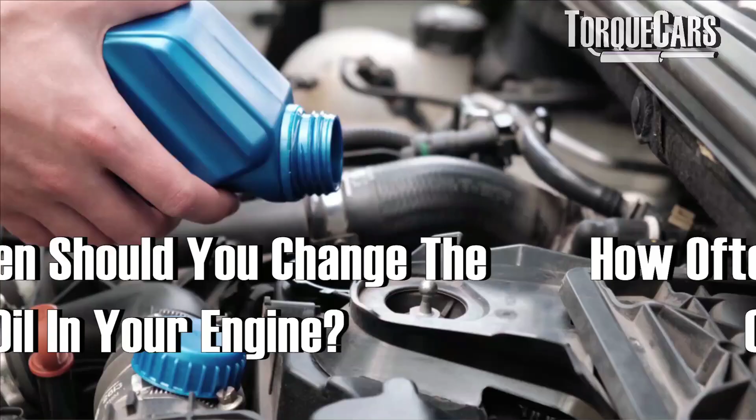How often should you change the oil in your engine? Some people say it's okay to leave it 24,000 miles or 2 years. Even some manufacturers have long service life schedules that recommend oil changes in terms of years rather than months. And other people insist that you should change the oil every 6 months or every 5,000 miles.

So in this video, we're going to look at the question of how often should you change your oil. We're going to look at what happens to oil as it ages, how it degrades, the problems you get when you don't change the oil frequently enough, and also a foolproof way of knowing for your own specific engine and car when you should change the oil. What is the optimum time or the optimum amount of miles to actually change it?

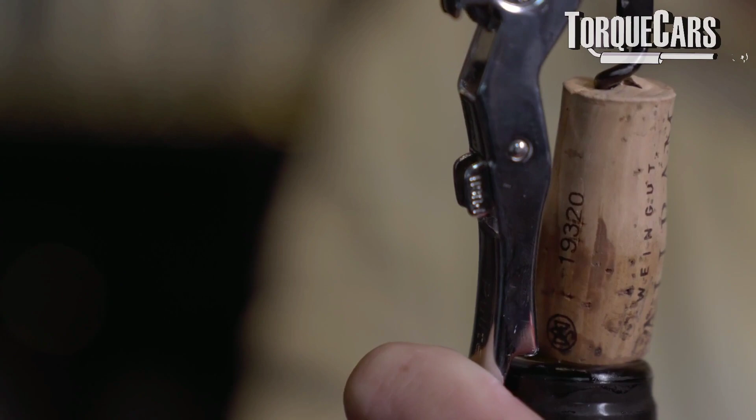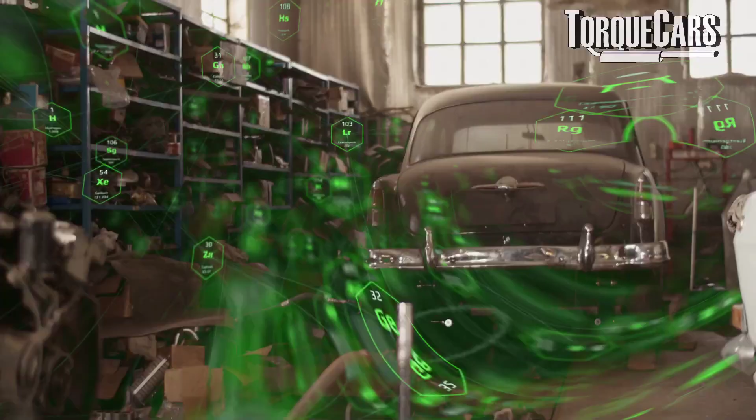So does oil degrade? Well, yes it does. Like anything, it will degrade over time. If you've ever left a bottle of wine open, you'll know that oxygen reacts with the wine, turning it into a very bitter vinegar. Engine oil also has a reaction that happens with oxygen. This oxidization process reduces the efficiency of the oil and reduces the characteristics, the flow of the oil, and the amount of protection you get from it in your engine. So even if you don't drive your car, there is an amount of time that the oil is good for inside the engine. Although it's sealed, it's still exposed to oxygen, so there's still this oxidization process going on with the oil itself.

Now inside the internal combustion engine, you're obviously burning things. You're burning the fuel, and the byproducts of that, the blow-by gases that come past the pistons, enter the oil and add to contaminants within it. So you've got various acids, various moistures. Even fuel and coolant can in some cases seep through the structure of the engine and be carried in the oil. All of those things are degrading the quality of the oil. It's becoming diluted, becoming less effective at reducing friction within the engine. So in real terms, this is changing the properties of the oil. It maybe doesn't stick to the metal surfaces long enough, or maybe the moisture content evaporates off, exposing metal surfaces, so there's no longer any oil barrier between it. So the catastrophic effect really is the additional wear and tear on your engine.

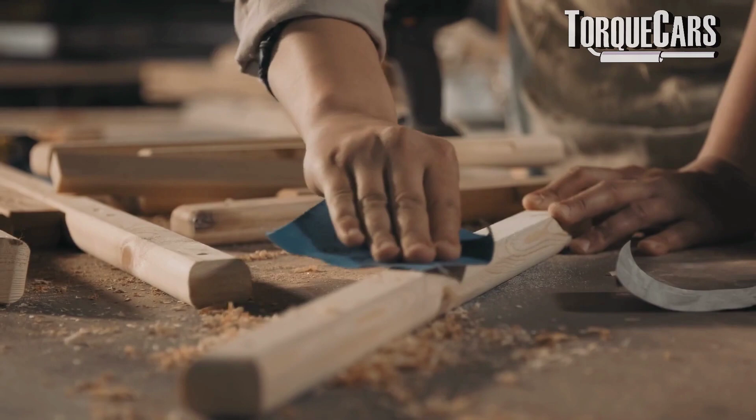So how do you know when the optimum time is to change your oil? Well, a little fact: if you were sanding a piece of wood, you'd notice tiny bits of sawdust coming off, and the amount of sawdust will really tell you how effective that sanding process has been. It's very similar inside the engine. If you've got wear and tear going on, tiny metal particles are going to be breaking off the metal surfaces as they rub against each other, contaminating the oil. That's also another problem you get, because these metal particles inside the oil will be adding to the wear and tear or abrasion inside the engine.

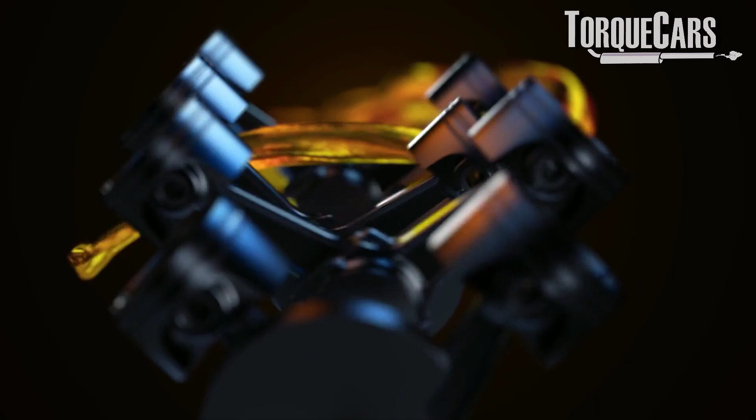It's fair to say that the oil filter itself will catch the larger particles, but we're talking about very tiny microscopic particles, and these particles flowing around the oil are really what you should be looking at when you get the oil analyzed. So when you send your oil off to a lab, they will analyze it carefully and give you a report back as to what it contains. By paying careful attention to the metal content of the oil, it will tell you how much wear and tear you get.

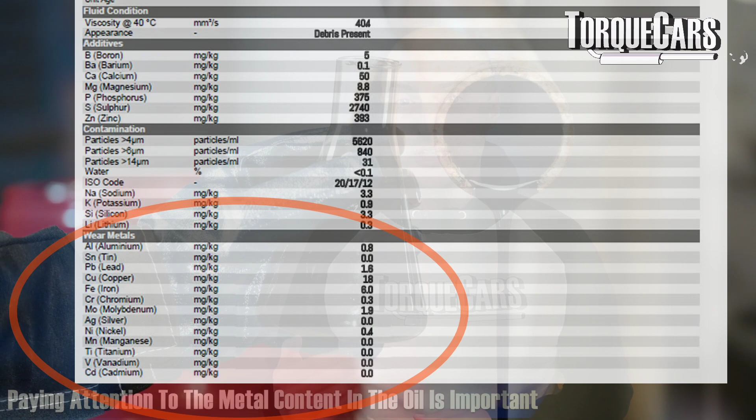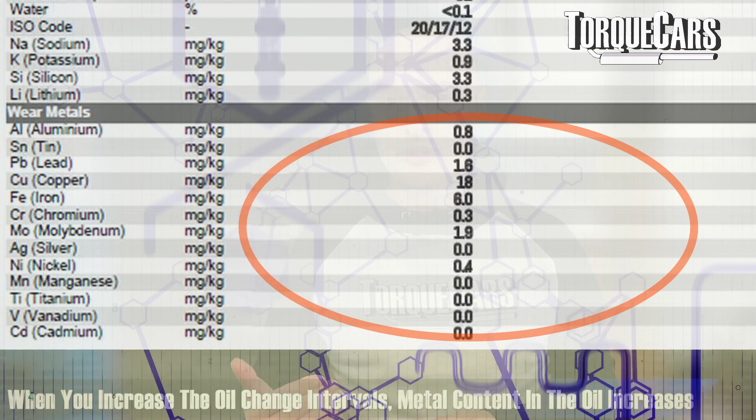So when I've done this on previous cars, if I've left the oil change to 24,000 miles as the manufacturer recommends, or 12,000 miles, you will notice there are a lot more metal particles in the oil. That would indicate that you should shorten the oil change schedule. You're not getting the protection.

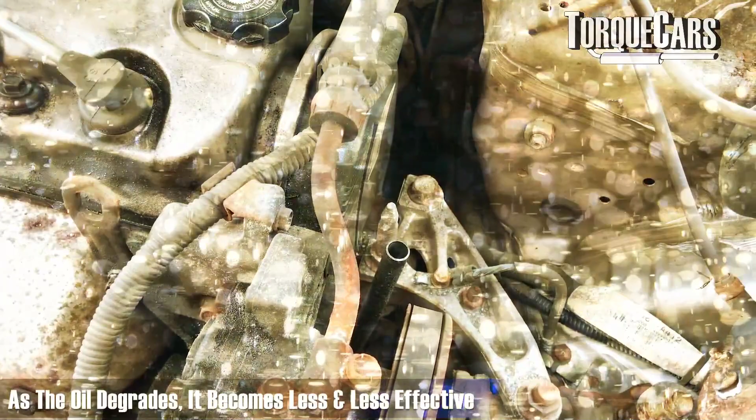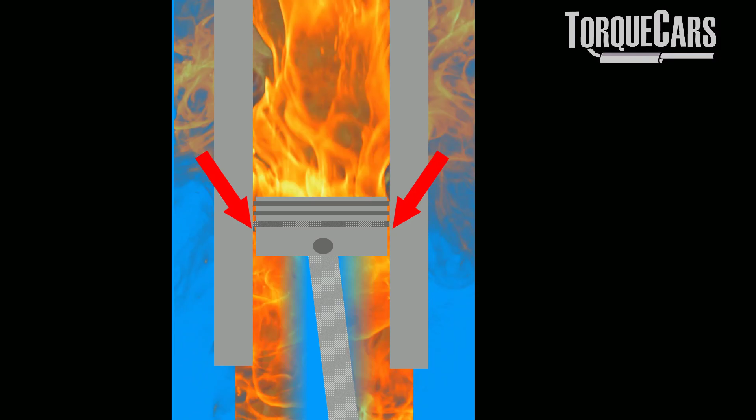The crazy thing is that the oil, as it degrades, becomes less and less effective. So the wear and tear will accelerate and get worse and worse. The longer you leave it, the more the engine will degrade. And an old worn engine degrades much more quickly than a clean, efficient engine. In a worn engine, you get problems with blow-by gases, where things don't quite meet as tightly as they were originally manufactured.

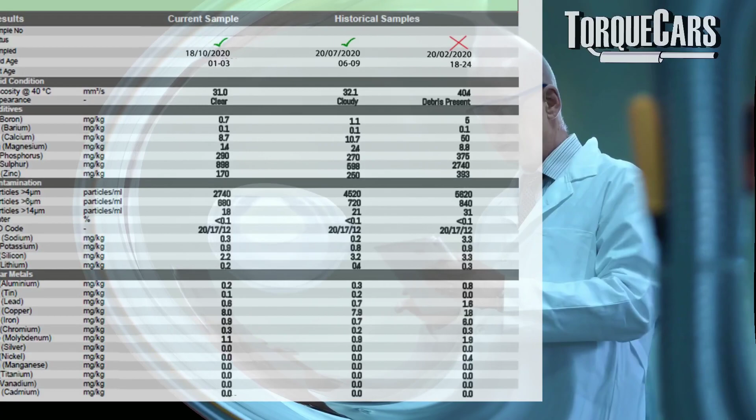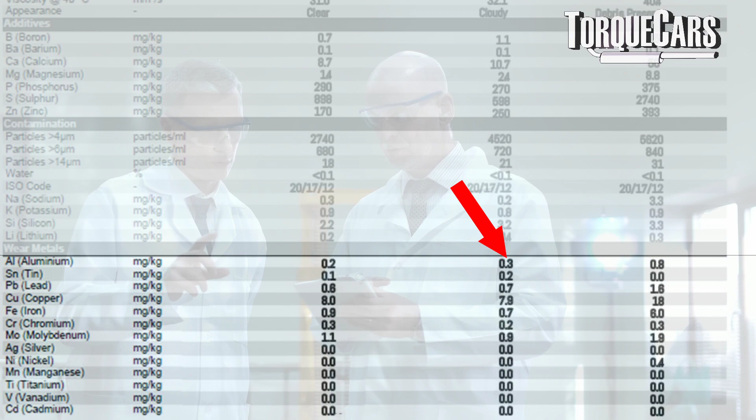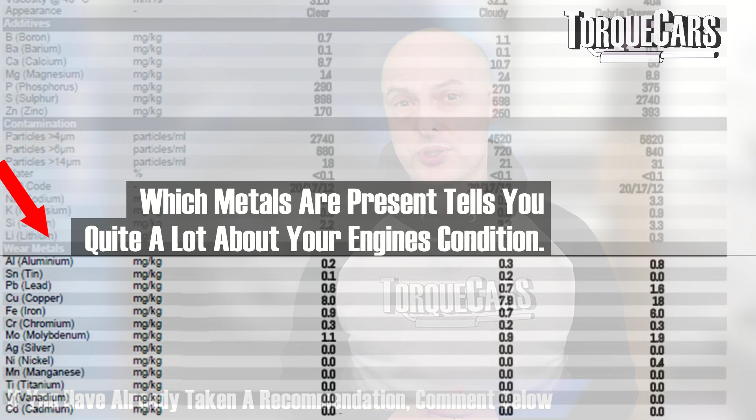So when you send the oil off for analysis after, say, 8,000 miles, you'll notice the metal particles in the oil are much reduced. But going to excessive levels like 5,000 or 4,000 miles, or 3 months, or just a few weeks, you're not getting much benefit over that optimum 8,000 mile mark. When you send it off, take a recommendation from them as to how often you should change the oil, and analyze it again at that point to see if the degradation has improved over that time. It's going to be different for every single engine out there.

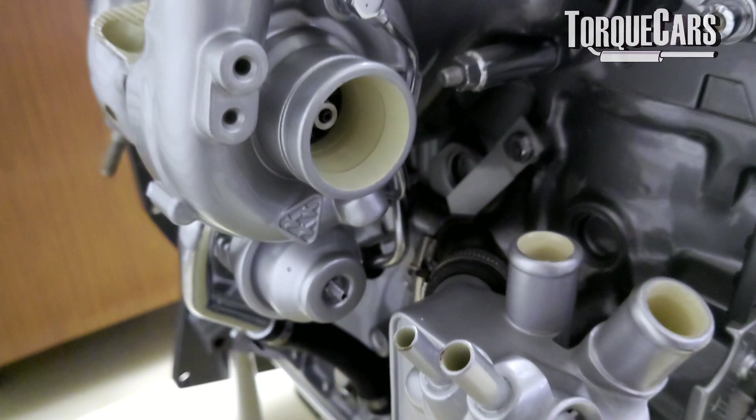I noticed that diesel cars with DPF filters run a heat regeneration cycle, and there's a lot of extra stress taken up by the oil in those. Also cars with turbochargers - the turbo itself gets very hot, and the oil can become very sludgy. It's vital that you adhere to the specifications and recommendations manufacturers make, because that helps protect the oil from this degradation that happens over time just due to the way the engine works.

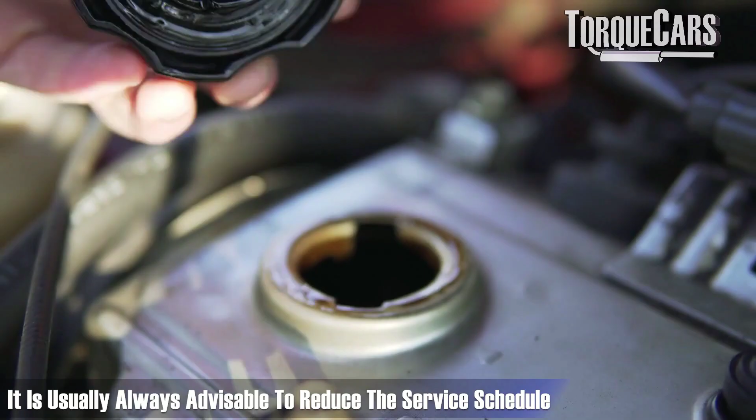So pay careful attention to the manufacturer's recommendations with the oil grade. It's usually always advisable to reduce the service schedule in a car. Most people that watch this channel have done some kind of mod or upgrade to their engine, so it will certainly pay to get those oil changes accelerated and do that more frequently than the manufacturer recommends.

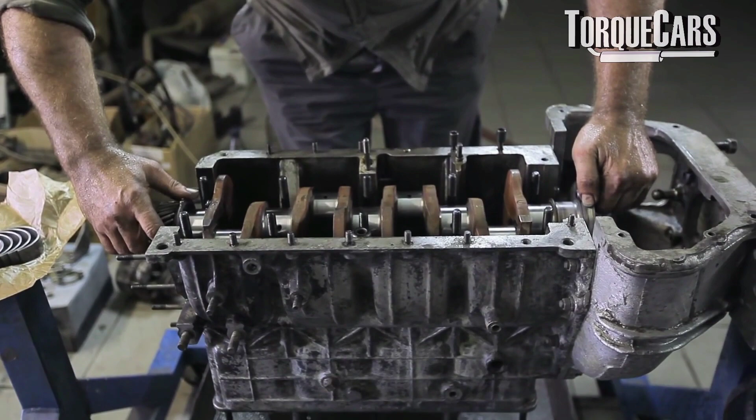Now, when you start stripping engines down, if they've had regular oil changes, you'll notice there is very little wear and tear that happens on them. I've got a friend with an Audi S6 that's just clocked up nearly 300,000 miles, and he's had no significant rebuilding work, no significant wear and tear on the engine. When you measure the compression, he gets really good compression in all the cylinders despite the mammoth mileage.

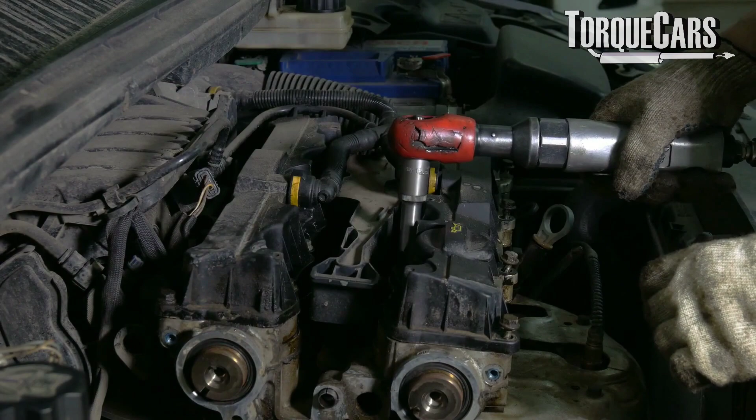Compare that with a car that's been neglected. Maybe they've not serviced it as often, maybe they've even reasoned that because they don't drive the car much, they don't need to get the oil changed as much. You'll notice there's a lot more wear and tear on the engine. Again, a compression test on those engines will reveal that most cylinder compression is substantially down on the manufacturer's standard tolerances they recommend.

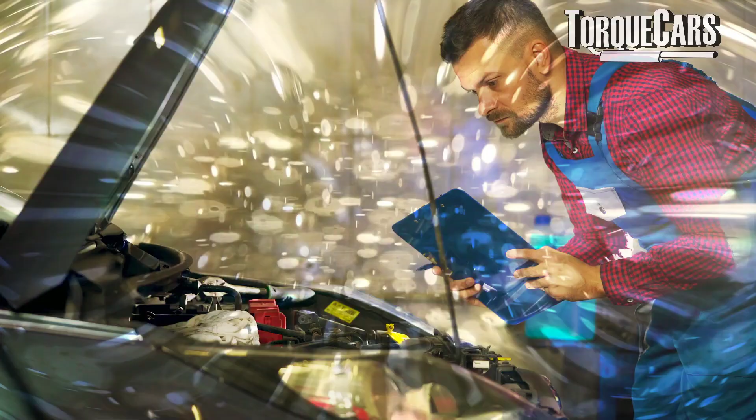What's my recommendation at the end of this video? For most drivers, I would recommend that you change the oil every 6 months or every 8,000 miles, whichever comes soonest - not whichever comes later. The amount of miles you do, the amount of driving you do, and the type of engine will have a bearing on it. But the only real way of knowing for sure is to get your oil analysed.

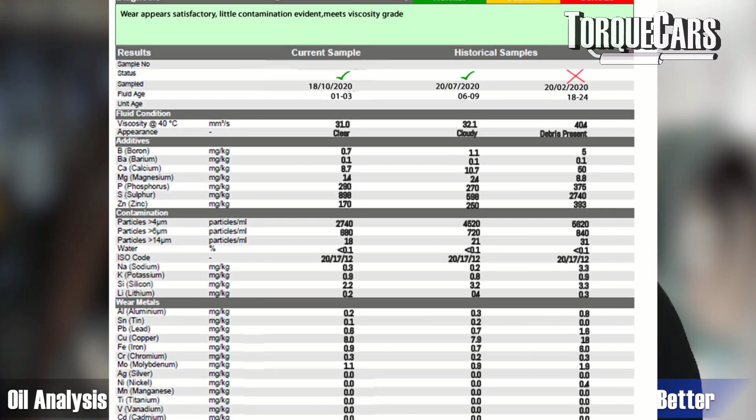Now, the cost of analysis is usually around the cost of the oil itself, but in the long term it's going to be an investment. You're going to understand your engine better, and you're going to be able to make better servicing decisions that are unique to your engine, your driving style, and how you actually use your car.